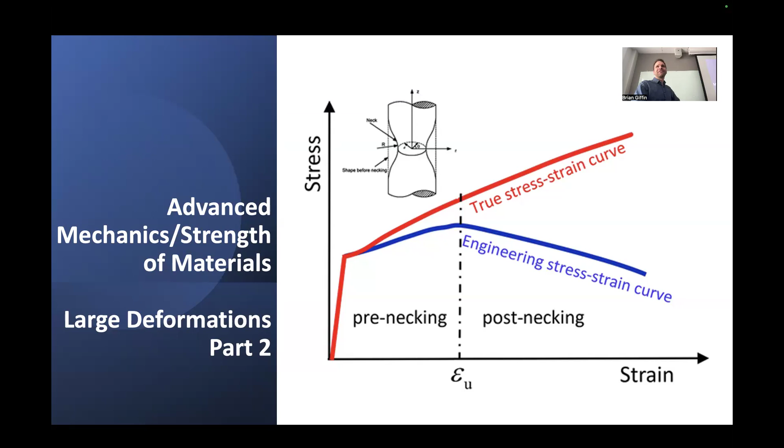All right. So today, very sad day for me personally, the end of our lectures. But we end on a bang. I like this subject in particular, this concept of large deformations. It's definitely something that introduces a significant increase in complexity to the theory, but as you'll see, it's really not such a great leap beyond what we've covered. And that's kind of why I think it makes sense to treat this as sort of a review subject.

When we started out in this class, we went through chapters 1 and 2. We went through the different governing equations of mechanics, and we related all these different quantities of interest to mechanics generally. We related things like displacement and strain, these deformation quantities that characterize the motion of bodies as they undergo the action of some external forces that might be applied to the body. And those forces themselves also had to be governed by principles of equilibrium, that the sum of forces acting on some body had to sum to zero for it to stay in whatever its position was, if it was under a state of static equilibrium.

And we developed equations that related all those different things. We related strain and displacement. We postulated this description of equilibrium. And we also found a way of connecting these different variables, these motion-like quantities and these force-like quantities to one another through our constitutive law, or basically our stress-strain relationships. So all of these things connected together gave us a description of how bodies move under the action of some externally applied forces. And that, broadly speaking, was mechanics.

So all of these things put together gave us the equations of elasticity, more specifically, examining how bodies behave when we treated them as these continua and described how they might undergo some local stretching surrounding individual material points, and how we were able to achieve equilibrium, now posed as a condition of equilibrium that had to be satisfied in this pointwise sense throughout the entire body. So all these concepts connected together, and we came up with this nice theory of elasticity, but it was limited to the fact that we had assumed certain things, and more specifically, we had assumed that the deformations that were occurring were relatively small. And that was characterized and reflected through all these equations that we developed.

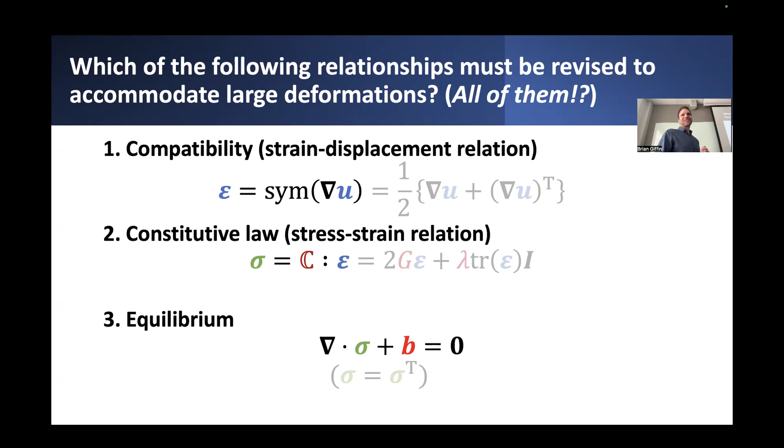But a question that you'll want to ask is, well, can we just take that same description of this stress-strain relationship and generalize it directly through this kind of extension, just substituting that small strain tensor with our Green-Lagrangian strain tensor, and then just say, well, that's our constitutive relationship, and that's the end of the story, and that's finite deformation mechanics. Wouldn't that be nice? What do you think? Do you think this is something that we could do? Let's just pick the Cauchy stress tensor. Let's say the Cauchy stress tensor is just some linear function of the Green-Lagrange strain tensor. Who says that'll work?

And who says it won't work? Yeah, some hesitancy, some uncertainty. Well, I think it's probably no surprise. It wouldn't be really interesting. I wouldn't have built it up if it wasn't kind of a notable question.

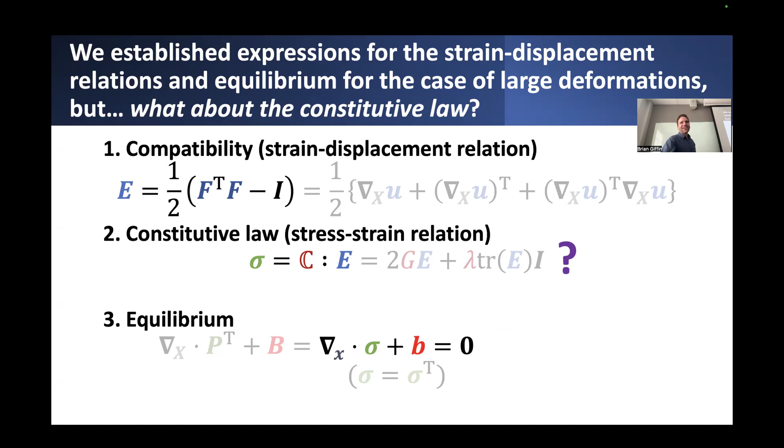But really, at the end of the day, the truth is that it's possible we could come up with some linear relationship between the Green-Lagrange strain tensor and some other measure of stress. And eventually we'll come up with some expression that gives us the Cauchy stress in the body, which depends in some fashion on this new strain measure that we've chosen. But it's not that simple. If only it were that simple.

The problem is when we're dealing with these bodies that might undergo large deformations, it really depends on how we've defined our strain measure. But in general, it's not true that you can just take this Green-Lagrange strain measure and plug it into our classical linear elastic constitutive model as we developed in the case of small deformations. You can't just do that and say, well, there's our relationship, let's just move ahead. It turns out it's a little bit more complicated.

So really the thing that we'll pursue is, how exactly do we come up with this relationship between strain, in this case the Green-Lagrange strain, and the resulting Cauchy stress that would arise due to whatever deformations the material experiences? That's the thing that we need to figure out. If it's not this, then what does it look like? And I'll say that it's almost right in the sense that we can still assume that there is some linear relationship between Green-Lagrange strain and some other measure of stress.

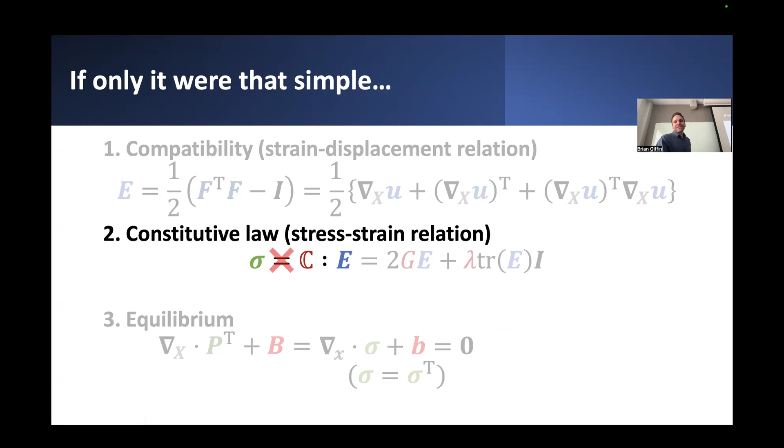And in particular, I'll point to this particular constitutive model. It's a relatively simple idealization of linear elastic behavior where, at least in this description, it looks almost like what we had previously. We can define some linear relationship through our constitutive modulus tensor. In the case of isotropic elasticity, it just looks a little bit like this. And it depends directly on this new strain measure, the Green-Lagrange strain. And at the end of the day, it gives us back some new stress tensor.

I'll call it capital S, not to be confused with the lowercase s deviatoric stress tensor from way back when we were discussing decomposed representations of the stress. Capital S in this case refers to a particular stress measure, sometimes called the second Piola-Kirchhoff stress. And if you remember from last lecture, we distinguished that there were two alternative descriptions of stress depending on whether you were looking at things in the current configuration or the initial configuration. In the current configuration, it was the Cauchy stress. That was a description of force per unit of area over some chunk of area defined in the deformed configuration of the body.

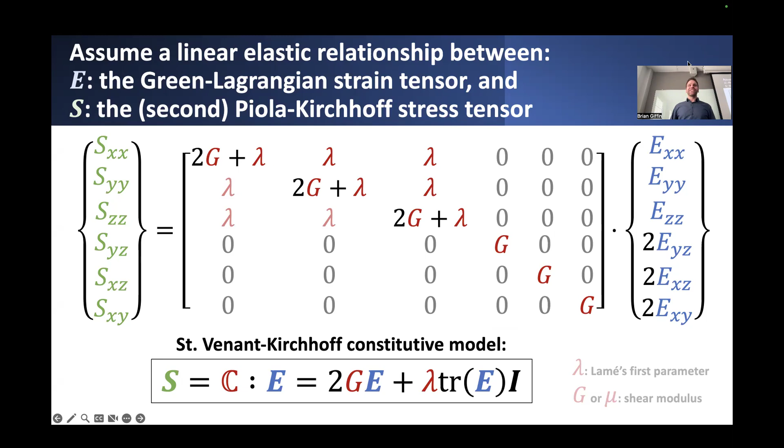So a good question is, well, what the heck is this second Piola-Kirchhoff stress? I've said nothing up to now except for this. I've said, well, I have this second Piola-Kirchhoff stress. It's linearly related to the Green-Lagrange strain, but what's its physical interpretation exactly? Like I said a moment ago, we knew kind of what this Cauchy stress thing was. It was the stress that you would see in some deformed state of the body.

And it had a nice interpretation and connection to tractions acting on any kind of arbitrary surface through Cauchy's stress theorem. And that gave us a nice physical intuition and interpretation of what stress meant. But what exactly is the physical interpretation, if any, of this second Piola-Kirchhoff stress tensor? And more specifically, how do we relate it to the Cauchy stress tensor?

Is there some way that we can transform our relationship for Green-Lagrange strain to second Piola-Kirchhoff stress yet further, so that we can finally obtain some expression for the Cauchy stress in terms of the Green-Lagrange strain? That's the thing that we're going to have to spend a little bit of time thinking about. But really, there's no immediate intuition behind what exactly this thing is. What configuration of the body does this connect to? And what kind of interpretation of force per unit of area can we ascribe to this particular measure of stress?

Unfortunately, there really isn't a great physical intuition behind the second Piola-Kirchhoff stress. There are a few somewhat excessively mathematical, if you can believe that I would say excessively mathematical, but it's a little bit fictitious. There's really not a great, actual physical meaning behind it. Nonetheless, we can move forward and say there is a way, in fact, to come up with this relationship that is nonetheless consistent with all the rules of mechanics that we've come up with up to this point, but it requires a little bit of a detour.

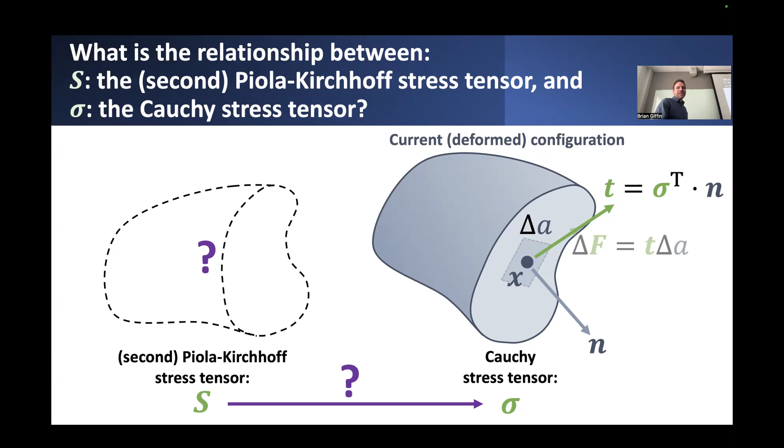It requires that we take a step back and think about not direct relationships between strain and displacement, but instead think of things in terms of rate of work that we do on some chunk of material. And you'll see exactly how this all connects together. But let's proceed along this line of reasoning by supposing that we had some chunk of material, maybe a small cube of material that we've extracted from some larger body, and we can look at what stresses act on the exterior faces of this cube, and also what body forces might act on the interior volume of this cube.

So just as we did when we were looking at definitions for equilibrium, considering a similar small cube of material and all the different types of exterior tractions and body forces that might act on that cube, we could look at that description of all these different forces in one of these two different perspectives, defining things with respect to some undeformed configuration of this cube or with respect to its deformed configuration over on the right. So now that we have some conception of this cube of material, it's got a bunch of forces that act on it.

After we've applied these forces, and maybe as we're actually ramping up the application of these forces, we might notice that these different cubes of material will start to deform a little bit. Maybe as we increase whatever external tractions are applied to this particular cube, maybe we're stretching it out in a particular direction. In doing so, we'll notice that the cube is itself deforming. It's also undergoing some kind of external displacements.

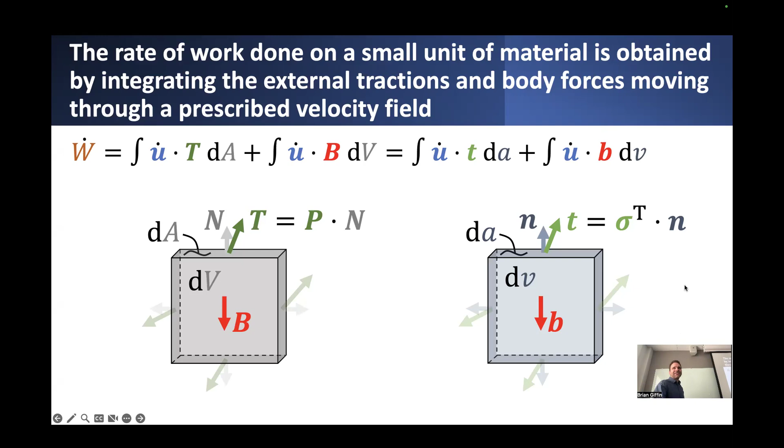And I won't bore you with the details of the derivation. If you like, you can step through and take a look at some of these steps. But really, the conclusion that we reach in looking at these expressions for external work that we're doing on this cube of material, you can go through a sequence of replacements.

You can notice that really traction is related to whatever the stress is that's acting on this cube through Cauchy's stress theorem. So we can replace traction by the stress tensor dot product with whatever surface normal that it's acting over. We can also take things one step further and, if we assume that this cube of material is small enough, take everything inside of this volume integral and transform these integrals over the boundary of this domain into equivalent integrals over the interior volume, but it looks a little bit different.

It involves not a dot product of the stress tensor with some exterior normal vector, but instead basically something called the divergence theorem, something that we used early on in the class actually to derive the equations of equilibrium to begin with. This divergence theorem basically transforms that dot product with a normal when integrated over some exterior area into a corresponding gradient of this whole thing, when integrated over the volume. So that's the divergence theorem, a transformation between area integrals and equivalent volume integrals.

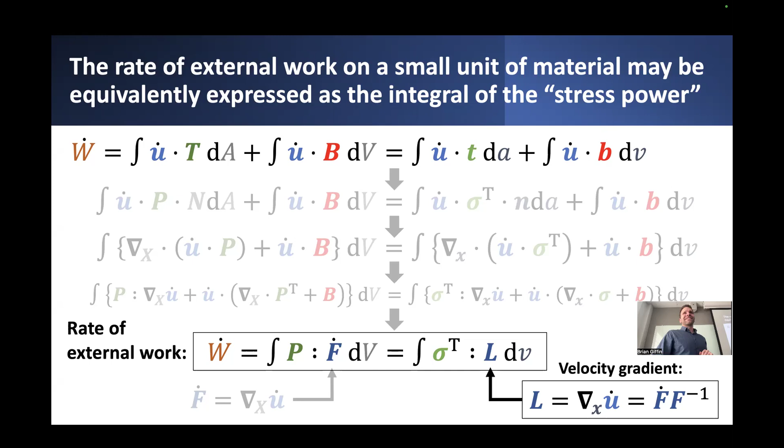Well, how is this useful to us in terms of how do we come up with, again, that relationship between second Piola-Kirchhoff stress and Cauchy stress? That was the thing that we wanted. So how do we get there? Well, you'll see in a moment, but really we need to also define one other kind of energetic quantity. And in fact, we've already defined it. It's this notion of internal or elastic strain energy.

Remember what that was. We defined strain energy in some chunk of material as basically being proportional to the integral over some, let's say, discrete volume of some strain energy density function. So strain energy per unit of volume that's proportional to the amount of strain or deformation that that unit of material has experienced. And we could compute what exactly that strain energy was by, let's say, in the uniaxial case of some chunk of material that's undergoing only uniaxial stress, let's say. It could be straining in other ways.

But suppose we had that, we could compute this elastic strain energy as really just the area under this uniaxial stress-strain curve. So if we happen to express axial strain, let's say EXX, the Green-Lagrange strain in the XX direction, versus the second Piola-Kirchhoff stress in the XX direction, we know, according to this assumed linear elastic relationship between Green-Lagrange strain and second Piola-Kirchhoff stress, that this should be indeed a linear relationship.

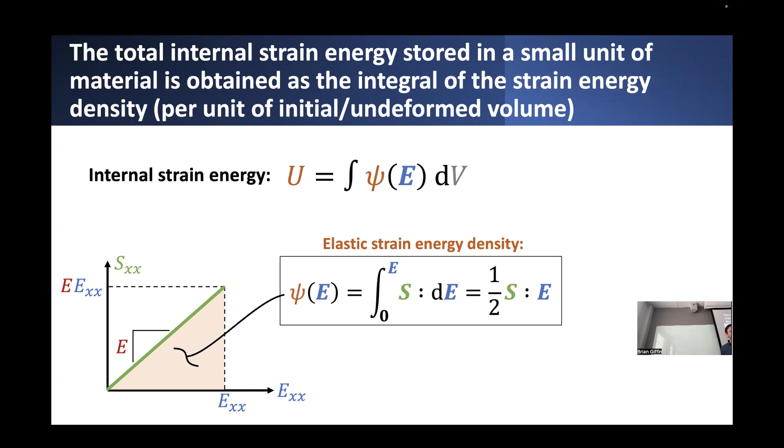out this integral operation. So if we did this kind of integral over some variation of strain to get the definition for elastic strain energy, equivalently, we could go the reverse direction and take the derivative of the strain energy with respect to the different components of strain in order to come up with the components of stress. And that's precisely how these hyperelastic constitutive models determine expressions for the stress.

It's not necessarily by supposing that there is some relationship that links strain and stress in this nice fashion. They actually typically start from here. They postulate what the strain energy looks like, expressed exclusively in terms of whatever strain measure you prefer. And in fact, it doesn't really matter which strain measure you choose, as long as it's some valid strain measure that applies in the case of finite strains. You can just come up with some expression that says this is the internal strain energy in this piece of material. It depends in some fashion on this particularly chosen strain measure.

And then if I wanted to know what's the stress and how does it relate to this particular strain measure, all I have to do is take this expression and take its partial derivatives with respect to the individual components of that strain measure. And what I'll get back are the individual components of the corresponding stress tensor related to this particular strain measure. So that's really how you define stress in this more general setting where you have large deformations occurring.

So we came up with this definition of stress a priori. We kind of said, well, wouldn't it be nice if we could find that? And the way that people go about doing that is usually they don't just say, let's just move ahead with this. They actually say, let's figure out what is the definition of the strain energy that would give me this. And then the stress is simply defined through these partial derivatives. So that's really the key distinction.

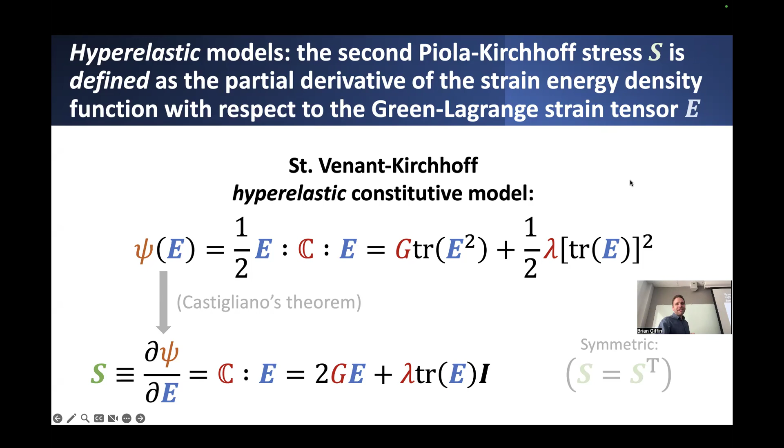So that's very nice. It's a nice starting point for how we go about devising a bunch of different types of material models, not just ones that look like this; there's many different ways you could choose to represent internal elastic strain energy, and then you come up with different descriptions of stress that drop out of that. But now that we have this expression for internal elastic strain energy, we want to connect it back to this external rate of work that we were doing on the material.

If we were deforming some chunk of material under some externally applied forces, and we found that the rate of work done by those external forces was directly equal to the integral of the stress power thing. Now, what if we said, whatever external work we're doing on the body, it can't just go nowhere. It has to go somewhere.

And there's really only two options for where whatever work we're putting into the material can go. It can either go into elastic strain energy, so energy that is stored in the material when I stretch it out. And that is basically represented by whatever goes into the internal strain energy as measured through the integral of this kind of elastic strain energy in the body.

So if, let's say, I'm putting in work, the rate of work is positive, and the rate of internal elastic strain energy is also positive, then basically it means that I'm putting in work, and at the same time, it's getting stored as internal elastic strain energy. So at least when I'm doing positive work on the material, you would expect the strain energy to be going up because some of that should be going into this stored elastic strain energy.

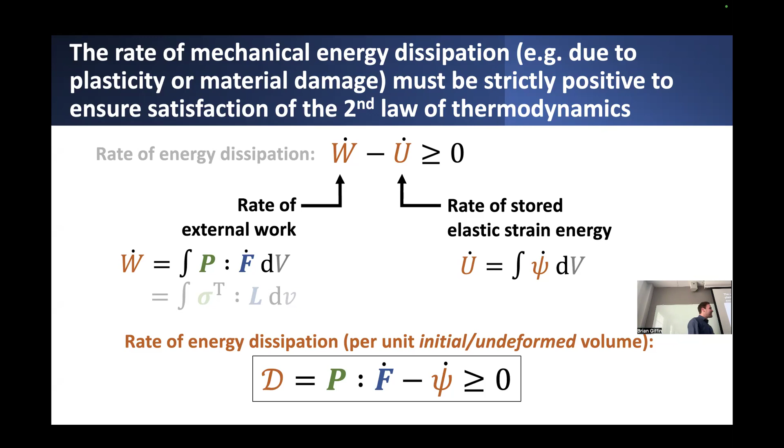But in general, we can represent all these relationships by noting that if we have the stress power term, the rate of external work we're doing on the body, and the rate at which internal elastic strain energy is increasing, we can express this per unit of volume. So a dissipation rate per unit of volume, which is basically the stress power minus the rate of increase in the internal elastic strain energy density. And again, that thing also has to be strictly positive or zero.

But in the special case, as in elasticity, where we know that there's no dissipation going on, or approximately no dissipation, such that any work we put into the material we expect to recover through mechanical work, such that the process is entirely thermodynamically reversible, then it suffices to say there's no energy dissipation going on. So we can say that the rate of energy lost through mechanical work is just equal to zero.

Any external work we're doing through stress power applied to the material has to go into elastic energy that's stored in the material. And those two things then have to be the same. They have to cancel each other out. So in other words, we come up with this relationship that the stress power is just directly equal to the rate of increase in elastic strain energy.

And because of how we've formulated our expression for this internal elastic strain energy, in terms of stress times some rate of applied strain, it's kind of the integrand of that integral that we were carrying out previously when we were computing the total elastic strain energy. It was the integral of stress times some increments of strain taken over many different steps. But if we now take the time rate of that thing, we get back our description of stress times this strain rate like thing.

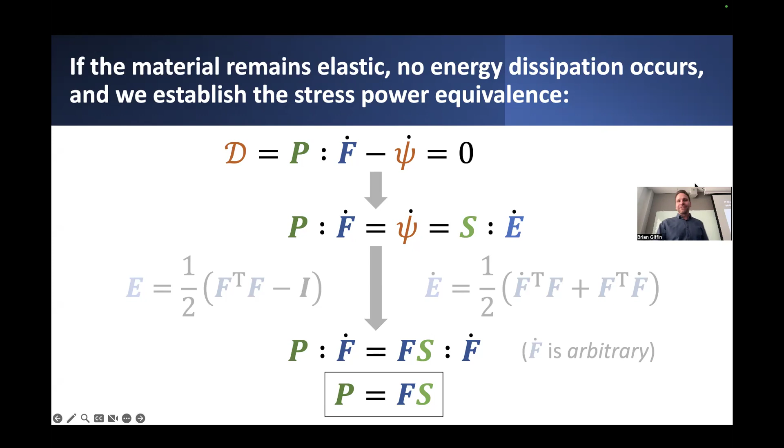And obviously, we can take that one step further. Now that we know the relationship between first and second Piola-Kirchhoff stress, we can remember from the previous lecture what our relationship was between first Piola-Kirchhoff stress and Cauchy stress, and rearrange things a little bit more. We'll get an expression for the Cauchy stress in terms of the second Piola-Kirchhoff stress. So we did it. It required a little bit of a digression, almost diving into thermodynamic principles, but it's fully consistent. It's energetically consistent, sometimes called thermodynamically consistent, a consistent representation of how those two measures of stress should be related to one another.

And it involves also, I'll just define here for convenience, J, which is nothing more than the determinant of the deformation gradient. That's a commonly used symbol, but in any case, it's just second Piola-Kirchhoff stress, left and right multiplied by F and F transpose. And what's interesting about this expression is, we know that the Cauchy stress has to be symmetric. That was a requirement in order for moment equilibrium to be satisfied.

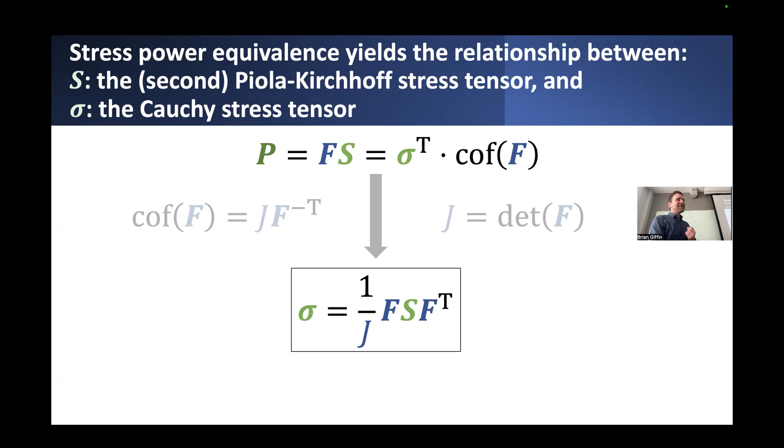It turns out that the second Piola-Kirchhoff stress is also symmetric. And you can kind of see that by virtue of how this relationship unfolds. If we're left and right multiplying by the same tensor, F and F transpose, then the resulting matrix that comes out of this matrix multiplication gives us back a symmetric tensor. So both of those two measures of stress are symmetric, which is kind of nice. It's convenient.

But at the end of the day, that finally comes together. All of our different expressions for the governing equations of mechanics, now in the presence of finite deformations, are complete. We've figured out our revised strain displacement relationship in terms of this Green-Lagrange strain measure. We've come up with our new constitutive law that involves a second Piola-Kirchhoff stress derived directly from some postulated internal strain energy function that might depend on the Green-Lagrange strain. We have a way of transforming that second Piola-Kirchhoff stress into an equivalent Cauchy stress. And finally, we have equilibrium, expressed directly in terms of the Cauchy stress, as defined relative to the deformed configuration of the body.

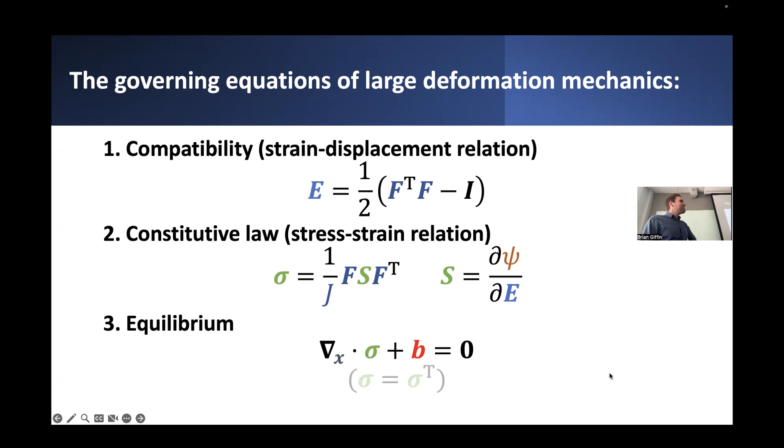So it all came together. And in the end, it doesn't really look all that much more complicated than what we had derived previously. It didn't really change too much. So really, what is the consequence of doing all this? And why do we care about large deformations in general? Well, here's one relatively simple example: the case of some uniaxial bar or uniaxial chunk of material. Maybe it has initial unit size, or maybe each leg of this cube has length delta x, y, and z.

And let's imagine that we put this cube of material in a state of uniaxial stress. So we apply some uniform force F on both of the x faces of this cube. We stretch it out in some direction such that maybe it elongates in one direction and then it contracts in

the other two directions. And we want to know, given these more general expressions that relate finite deformation measures of strain and stress all together and equilibrium, how exactly does our classical description of linear elasticity connect and compare with now descriptions of finite strain elasticity? And we'll look at this from the perspective of the different deformation quantities of interest first.

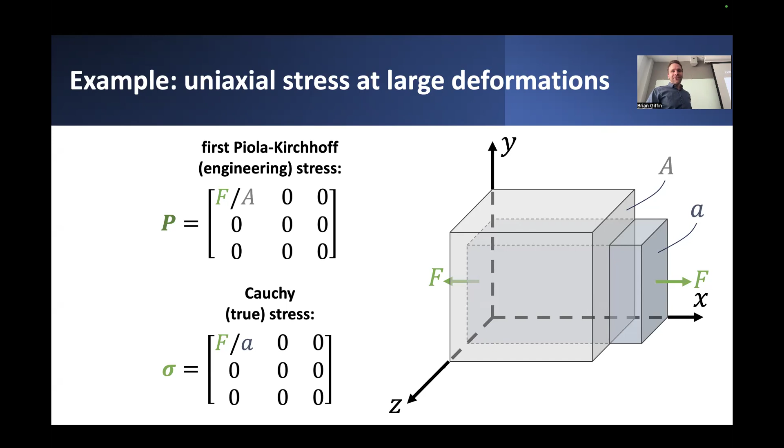All right, so all of that being equal, given our descriptions of either first Piola-Kirchhoff stress or engineering stress, alternatively, if we prefer, we can express everything in terms of Cauchy stress or true stress. We can use those relationships we just derived to transform this representation of stress into a representation for the second Piola-Kirchhoff stress, the thing that we had a relationship for that gave us a way of relating stresses and strains, in particular the Green-Lagrange strain.

But before we can apply our constitutive relationships, we actually had to take whatever these different measures of stress are and transform them into this particular stress measure. That's kind of the extra step that we have to do when we solve these types of large deformation problems. So at the end of the day, for this problem, it's not so bad.

If we wanted to find, let's say, second Piola-Kirchhoff stress, given first Piola-Kirchhoff stress, all we have to do is left multiply by the inverse transpose of the deformation gradient, which is equivalent to just dividing all these entries by the diagonal entries of the deformation gradient. So if before we just had F divided by A, now it's F divided by A times lambda x, the actual stretching in the axial direction, which seems a little unphysical.

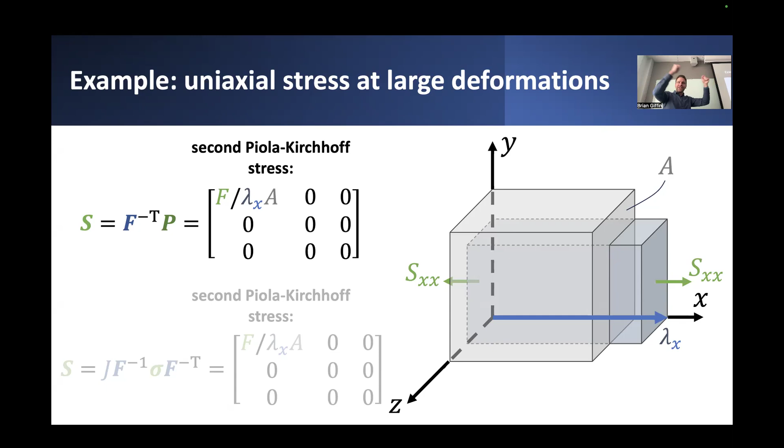What the heck is this? Again, like I said before, second Piola-Kirchhoff stress doesn't really have a great physical intuition behind it. It's really just a convenience for how we relate stresses and strains. But in any case, we have it now. We have some measure of the SXX stress, the second Piola-Kirchhoff stress, expressed in terms of whatever external applied force and whatever axial stretching might occur in the X direction for this cube.

Now we can go through our constitutive relationship. Now we can say, I know that the state of stress in this cube under a state of equilibrium is going to look something like this. And to make things simple, I'll say that all of the shear stresses in this cube are zero, assuming that it's not going to get skewed or anything. So really, there should only be normal stresses acting on this cube.

There might be, obviously, some normal stress in the X direction, on this X-directed face of the cube, and on these lateral surfaces, whose normals might be in the Y or Z directions, we assume that there's no stresses there. So we can just say that SYY and SZZ that would otherwise be in these two slots here are just zero. So at the end of the day, we just have SXX, and SYY and SZZ are zero.

Then we can just go backwards. We can invert our constitutive relationship. We can express it rather conveniently just in terms of Young's modulus and Poisson's ratio through this kind of matrix-vector arrangement, or we can express it as individual relationships. We can then come up with the explicit expressions for the different longitudinal components of strain.

But these expressions for the strain are, remember, expressed as the Green-Lagrange strain tensor components, its longitudinal components. Nonetheless, everything else looks the same compared to our classical linear elastic relationships. The only difference is we have to be careful about which particular measures of stress and strain we're looking at. So at the end of the day, we'll get some expression for longitudinal X strain, which is going to be proportional to just SXX divided by Young's modulus.

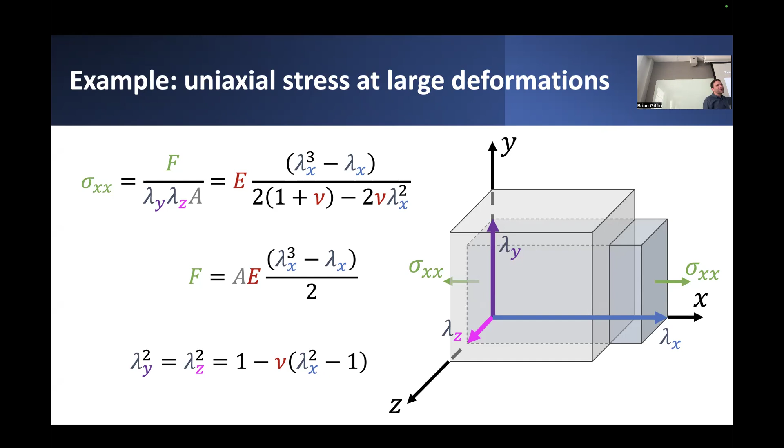If they're less than 1, this means that f divided by a, now divided by some quantity less than 1, implies that sigma xx is going to be greater than f divided by a alone. So as the cross-sectional area shrinks, the Cauchy stress appears to increase, inversely proportional to the decrease of the cross-sectional area under deformation.

Now, what's interesting is that we can compare all of these measures of stress we've developed. We can look at Cauchy stress, force per unit of deformed or final area, expressed exclusively in terms of the axial stretch ratio. We can also look at engineering stress, defined in terms of these finite strain and stress measures, and it'll look almost the same. It just won't be divided by this extra term.

And finally, we can compare it against classical linear elastic theory. What would the stress be if we just assumed linear elastic deformations? That's equivalent to saying the axial stress should just be Young's modulus times lambda minus 1, where we define lambda, the axial stretch, as the initial length plus the change in length, ux, divided by the initial length, or just 1 plus ux divided by delta x.

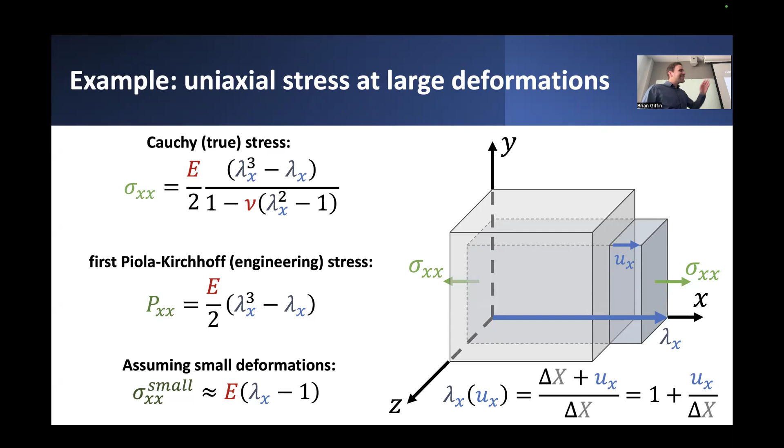If you like, ux divided by delta x, that's just the axial small strain, which if we plug it in here, gives us back what we expect. That axial stress in the small strain setting is just equal to E times epsilon xx, the small strain in the axial direction. So it all boils down to the same thing that we expect at the end of the day in the case of small deformations. But what if the deformations aren't small? And what is the consequence of that for this particular problem?